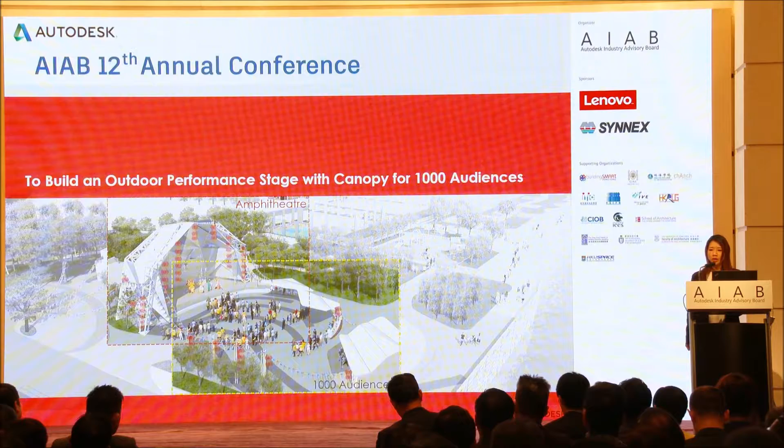Okay, the aim for this project is to provide an outdoor performance stage for 1,000 audience. And we have to also provide the shelter for the stage, ancillary facilities, lighting, and power outlets for audio systems. Also, we have to carry out an acoustic impact study for the Director of Environmental Protection Department to approve.

Our site is at Sheu Kei Wan. It is approximately 200 meters from the Sheu Kei Wan MTR station. It is adjacent to Aldrich Bay Promenade, Tam Kung Temple, Tam Kung Road, and Sheu Kei Wan Typhoon Shelter. The site area is 4,740 square meters, and the amphitheater area is 225 square meters. Yes, it is below 230 square meters, and no sprinkler is required.

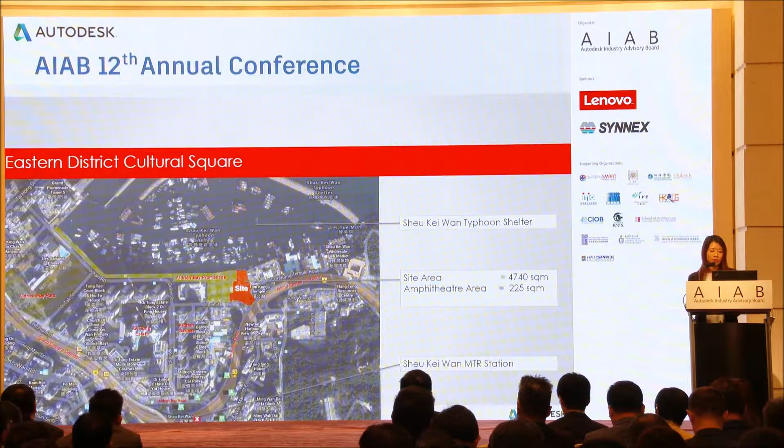Take a look at our surroundings. It is surrounded by schools, temples, and residential buildings. And the noise-sensitive receivers are found very close to the performance stage. The closest noise-sensitive receiver is as close as 50 meters away. It is really close. The shelter of the stage must be able to block the noise very effectively in order to meet the requirements from EPD.

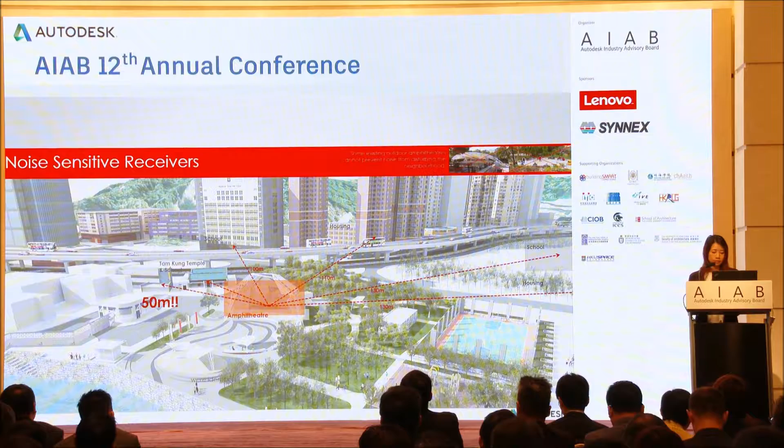So the challenge for our project team is to optimize the shelter design. Our project team is employing BIM to optimize the shelter design in order to design an effective noise barrier for the neighborhood and a good sound quality performance stage for the audience. And of course, we have to ensure the structure is buildable. And the aim for an accurate tender price is very important for our project because we only have a very tight budget. So we have to ensure the project is completed within the tight budget.

First, our acoustic consultant used BIM models to test the impact of different kinds of music based on the background sound generated, and they tested on the site. In order to design an effective noise barrier, we have to note the sound level of the site first. After testing with different types of music related to the site, we found that pop music, jazz music, and Chinese opera are okay for performance on the site. However, there will be no rock music.

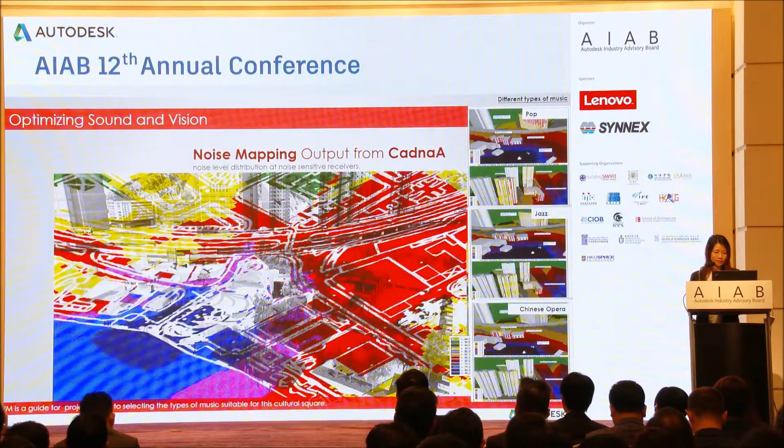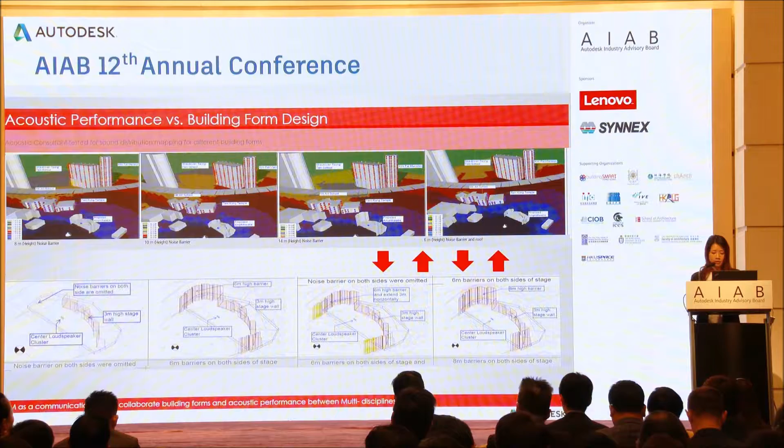And for the sound and forms, acoustic consultants also tested different forms, such as with walls to serve as noise barriers. Different heights of walls are tested in the computer. And architects, structural engineers, and QS all work together on the sound performance test and the forms. And then acoustic consultants will test the forms again. And this collaboration went through several times until we got the final form of the shelter.

By combining noise barriers of different heights and roof designs, the most effective noise barrier performance was achieved, and a steel structure was adopted to minimize the building bulk. The form of the amphitheater is irregular, so the geometry of the structural steel members and the aluminum panels of the cladding system are irregular too. Hence, a wide range of member sizes and connection details are incorporated into the design. This is a challenge to our team because it cannot be presented in traditional 2D drawings.

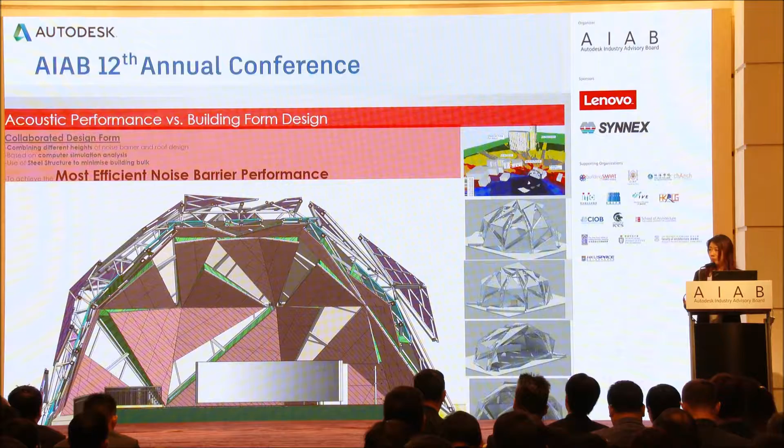If we draw this in our traditional 2D drawings, we need a lot of technical skill and, most important, a lot of imagination. So BIM was used as a tool for designing this shelter. The shelter comprises 3 layers. The middle layer is the functional layer. It is the most important layer of this shelter. The acoustic aluminum cladding system acts as an acoustic barrier and a waterproof layer, and the layer forms a continuous surface to protect the stage.

And then the second layer is the inner layer. This is a layer for sound absorption and reflective layers. So in BIM, we tested these layers with different angles and tests so that it will give a good performance and good qualities for the performance. And this layer is made of aluminum perforated sheets.

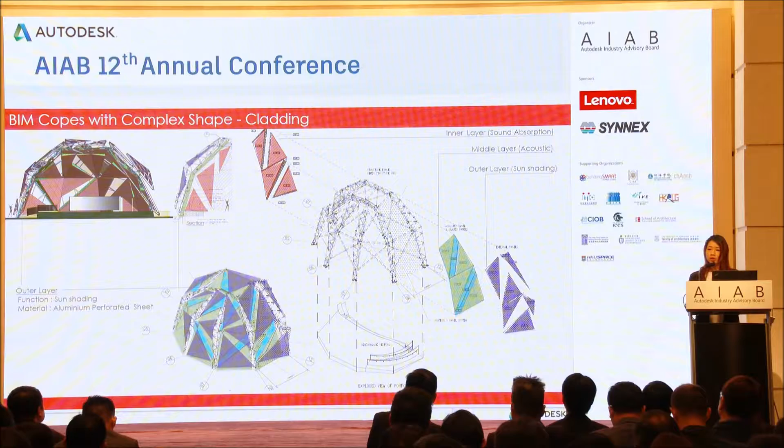And the last layer is the outer layer. This is a layer for sun shading, and it is also made of aluminum perforated sheets. And different elements from different planes, determining the elements, lengths, angles, and how they are fixed into each other could not be done in 2D drawings. With BIM, now we show the real situation of how they join together, and sometimes we can even explode views of certain elements so that we can know clearer or communicate clearer.

And then for structure, the complicated steel system can only be presented in 3D format of BIM, which shows the actual build-up of the design and connections in detail. During the design stage, when the structural members and aluminum panels were integrated in the BIM environment, the sizes of certain structural members were found too slim to anchor the aluminum panels attached to them. So the design team corrected the sizes and verified the connection.

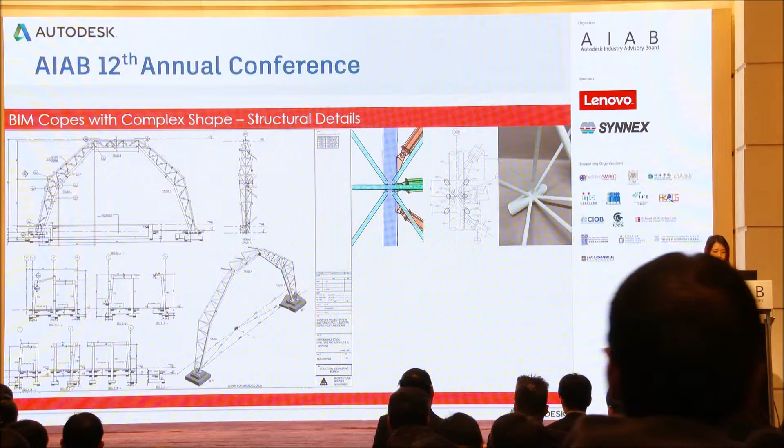This is very important to our project because we have limited time and limited budget. So we resolve the problems in early stage, which can reduce the time and the cost implications in the construction stage. And for the cost, as I mentioned many times, our budget is very tight. Therefore, accurate cost estimation is very important. The panels are tilted, so there's no way to determine the sizes and cost in the 2D drawings. So how are we going to make an accurate cost estimation?

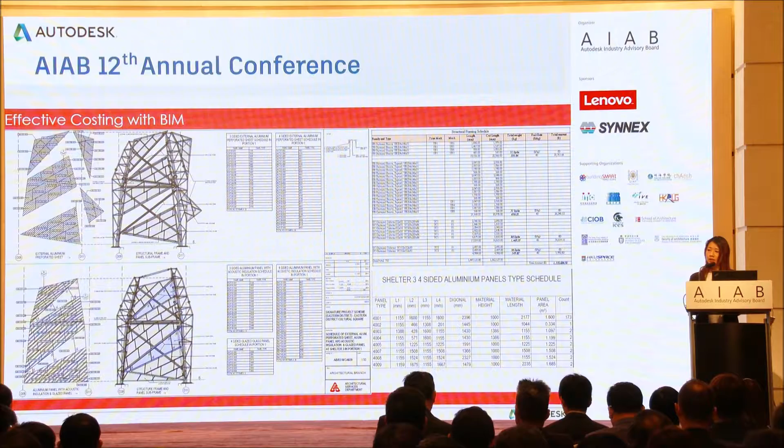We use BIM and Dynamo to allow accurate specification of sizes and cost. We list all the steel members and all the panel sizes to allow accurate costing. Also, we use BIM to test whether more normal size panels can be fit into the design. And eventually, we can standardize 30% of the panels.

And also for constructability, BIM enables easy and repeated simulations of the construction process in the VR environment. Hence, the design can be refined to achieve optimum solutions on standardizing of members through this simulation process. Constructability of the design is improved and the cost is toned down.

With 3D models, communications with our users, contractors, suppliers, operators and all other disciplines were so much easier. It's much easier to explain to different disciplines how the 3 layers of the shelter function. Now, I would like to present a video to show more details of our project.

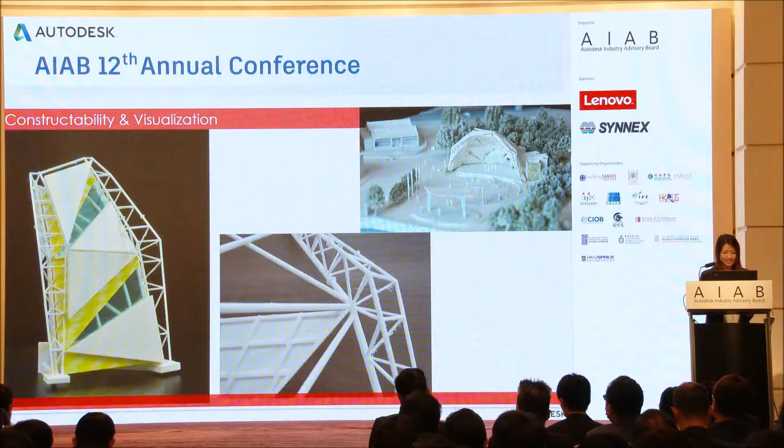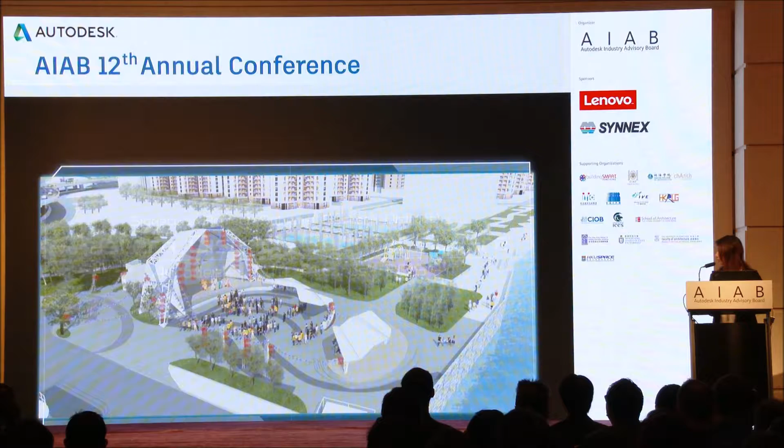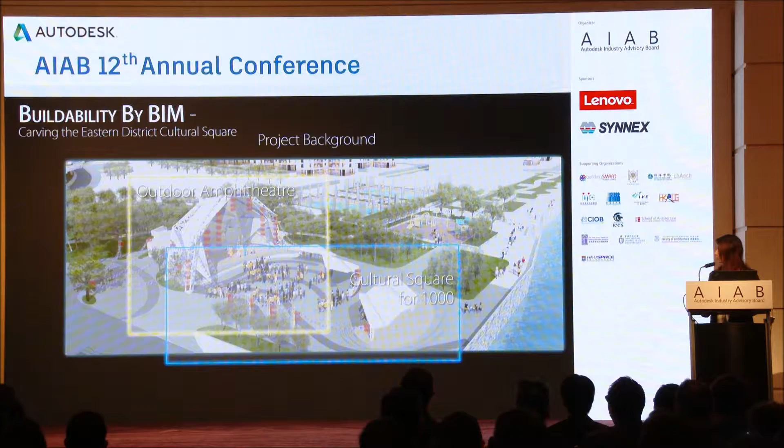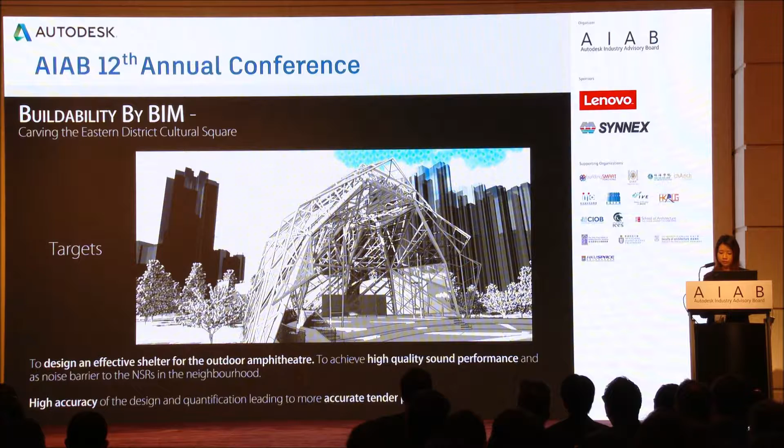Signature Project Scheme at Eastern District Cultural Square. This project is a signature project proposed in the Eastern District. An outdoor performance stage for 1,000 audiences with canopies, integrated ancillary facilities and lighting, as well as power input for audio systems. The target is to design an effective shelter for the outdoor amphitheater, to achieve high quality sound performance and act as a noise barrier to the NSRs in the neighborhood.

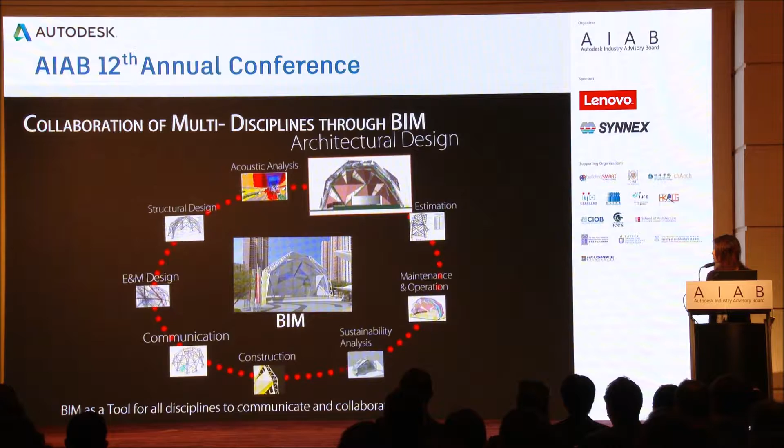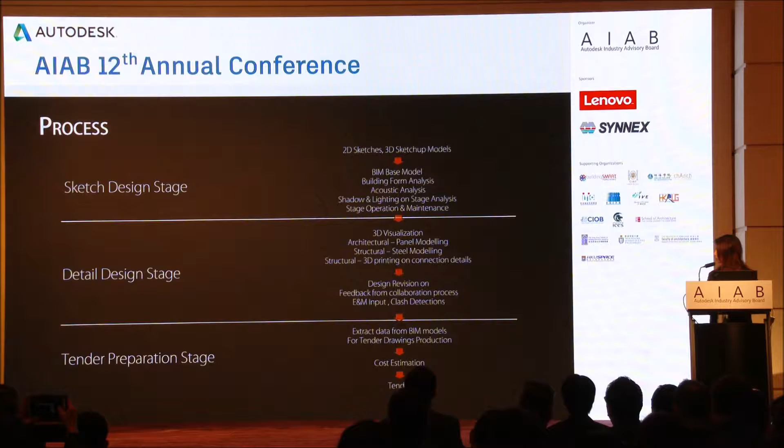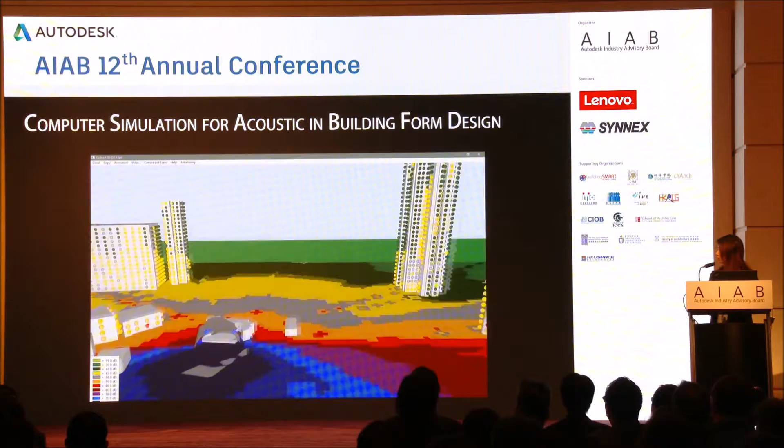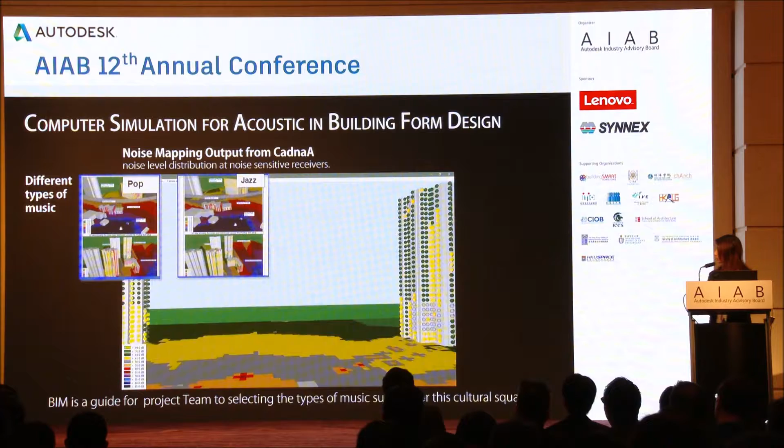BIM is used for sketch design stage, detail design stage, and tender preparation stage. Noise-sensitive receivers are found very close to the amphitheater. BIM acts as a guide for the project team to select the types of music suitable for this cultural square.

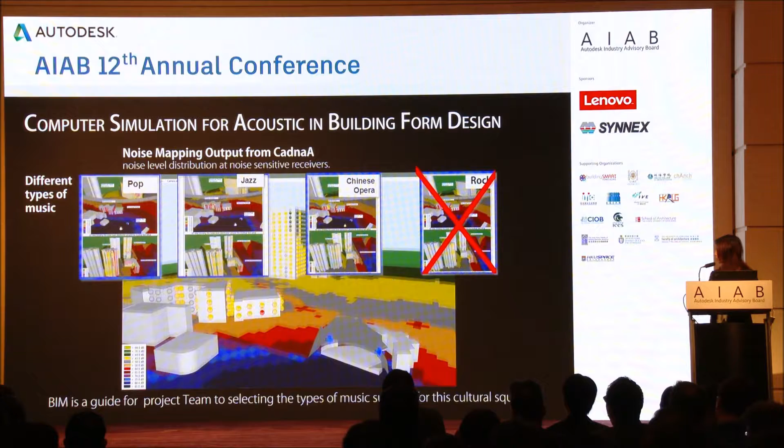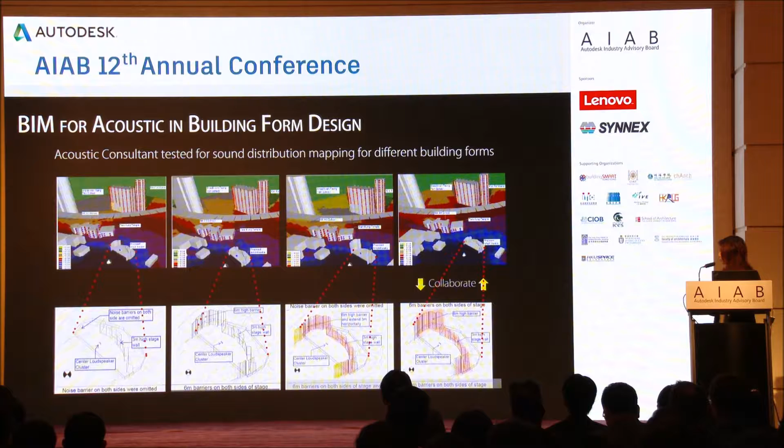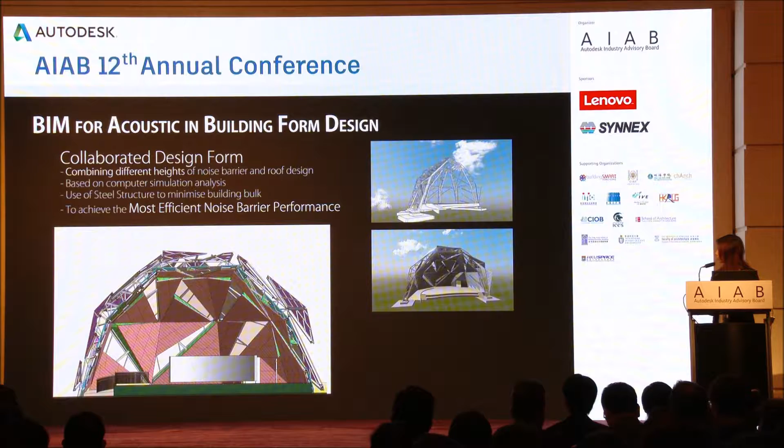An acoustic consultant tested sound distribution mapping for different building forms. The architect and the structural engineer revised the building forms according to the sound distribution mapping. Instead of designing a large, thick, tall amphitheater, the project team aimed for an effective noise barrier with minimised visual impact to the surroundings. It helped the project team to specify the material requirements in the tenders.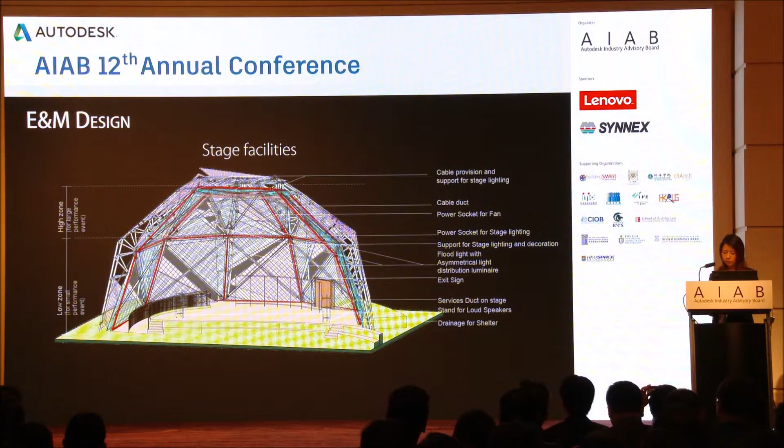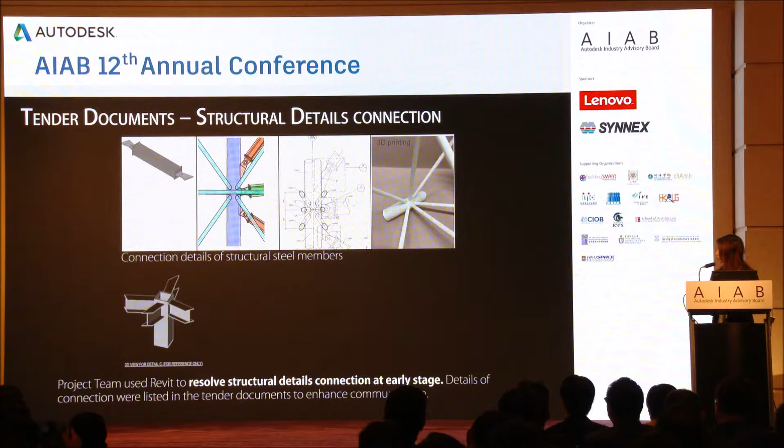Project team used Revit to resolve structural detail connections at an early stage. Details of connections were listed in the tender documents to enhance communication.

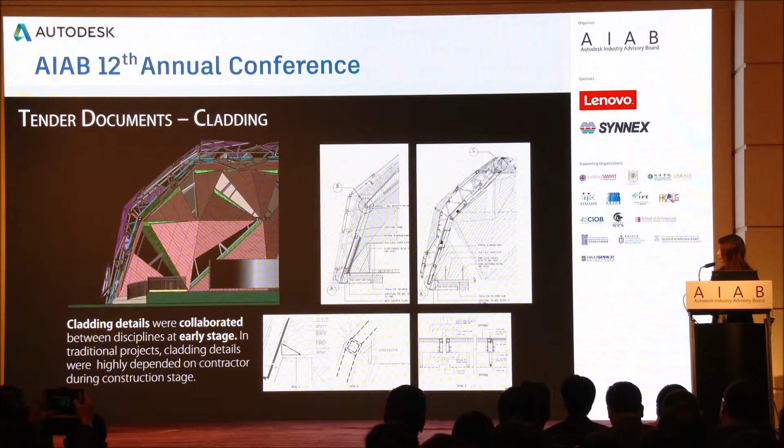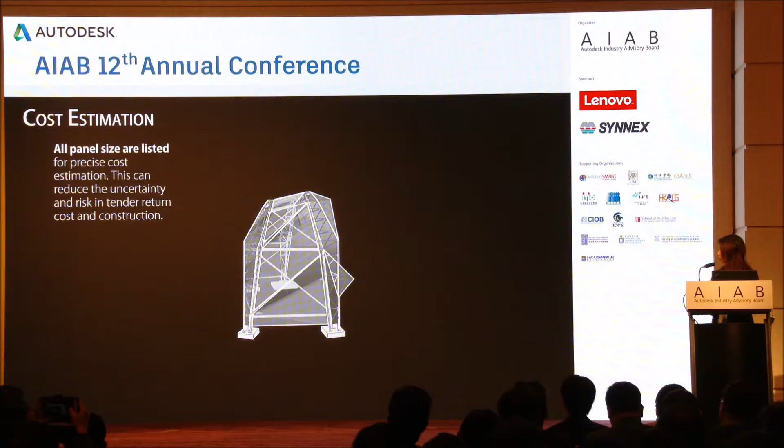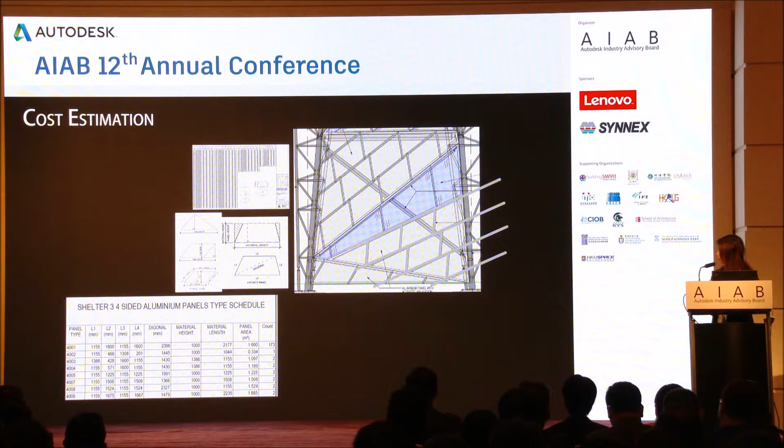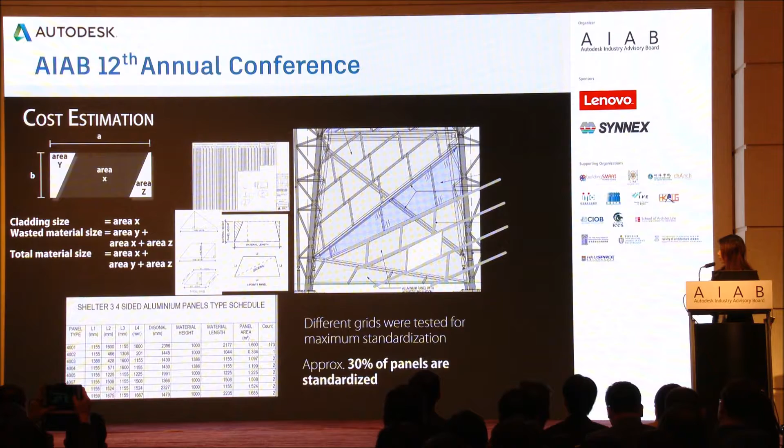Utilizing Dynamo in Revit, all panel sizes are listed for precise cost estimation. Approximately 30% of panels are standardized. All structural member sizes are listed for precise cost estimation.

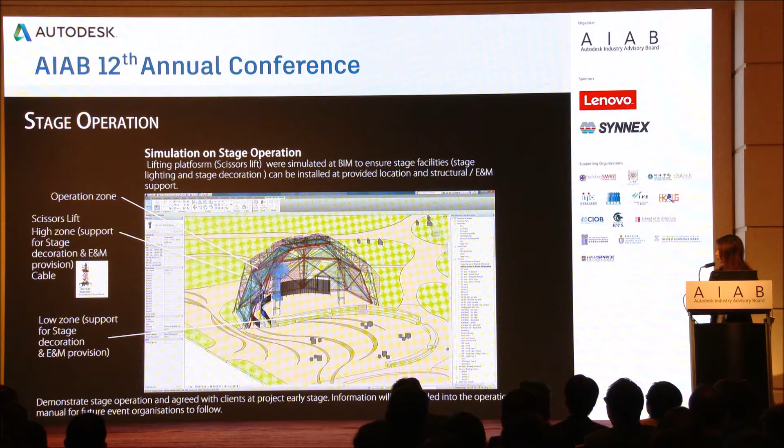Early testing on cladding systems allows for early resolving of construction problems.

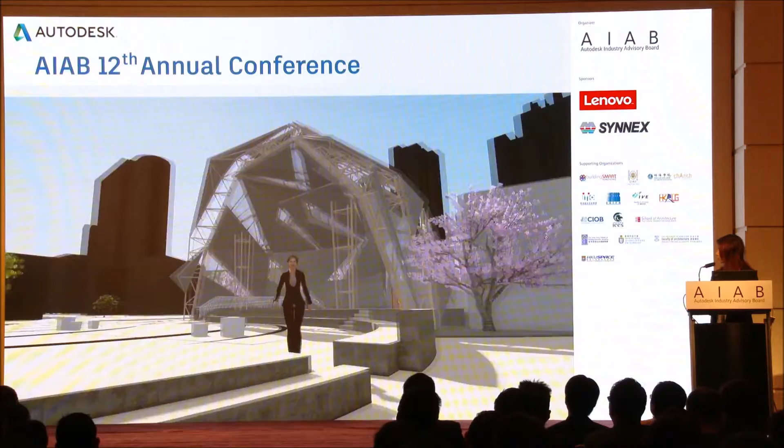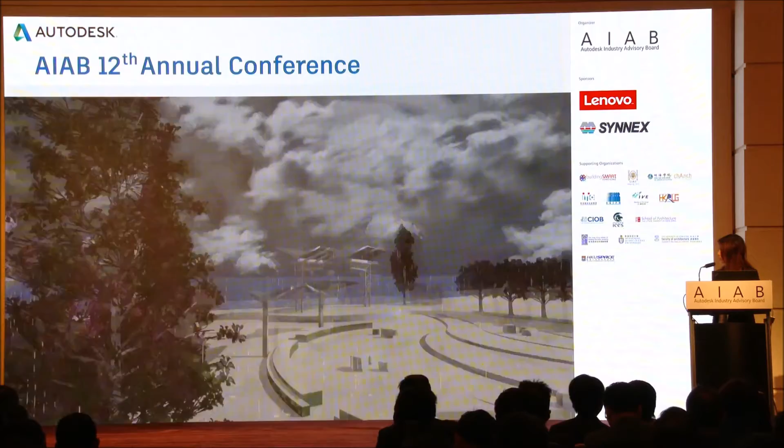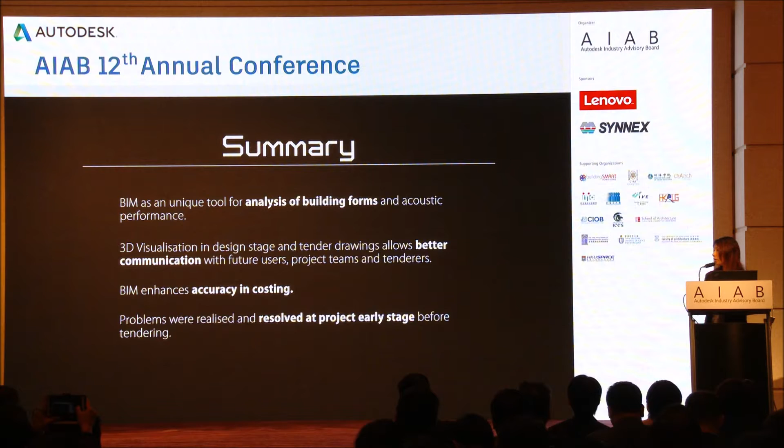BIM is a unique tool for analyzing the building forms and acoustic performance; it allows better communications and accuracy in costing. And most importantly, the problems were realized and resolved at the early stage. And the conclusion: BIM as a tool for designing an effective noise barrier and good sound performance for an outdoor amphitheater, for collaborating across multiple disciplines, and enhancing current practice with BIM technology in enhancing visualized experience and communication.

We have used BIM to work out these wonderful results, and so HKSAR will continue to develop in-house expertise on BIM in an incremental manner. We shall continue to encourage stakeholders in the industry to adopt BIM on the project-based level appropriately. Thank you very much.